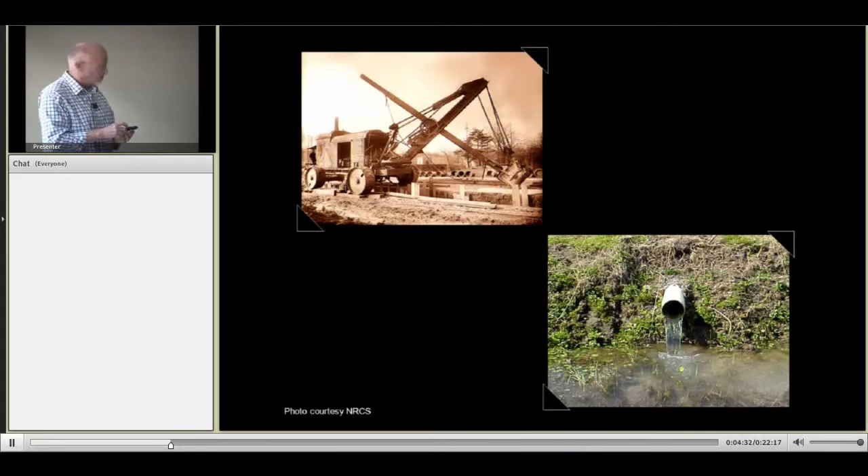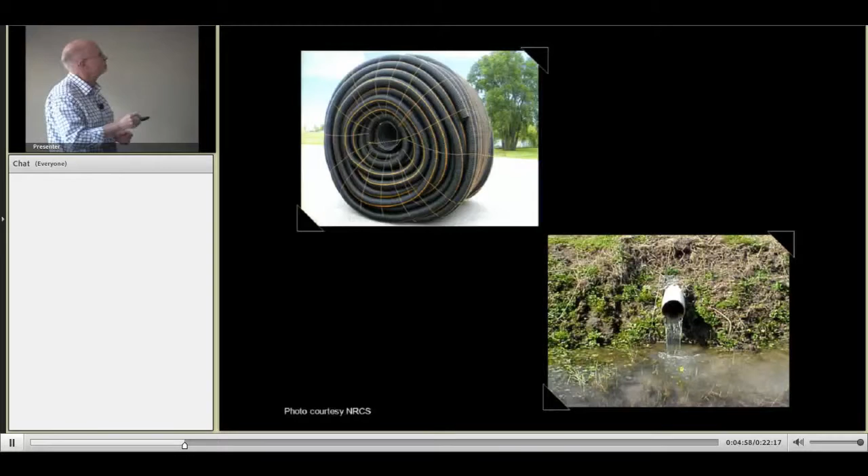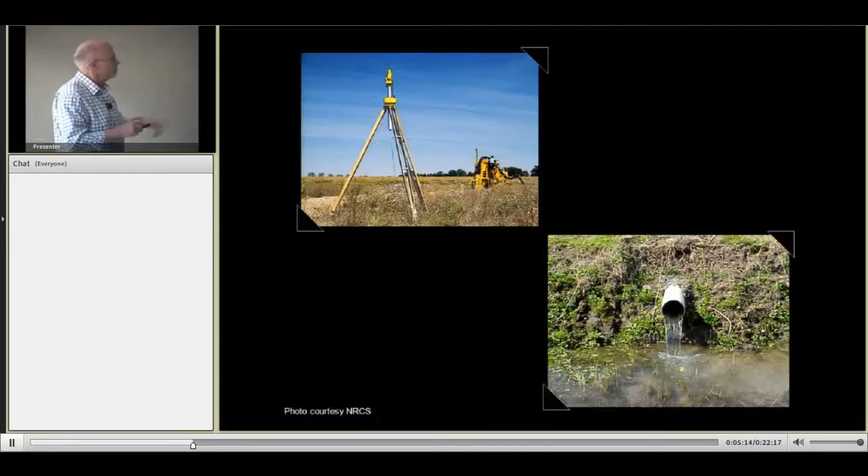We've evolved to, this is showing a laser, the technology for putting in pipe has changed. It's gotten more effective, more accurate. People can do it more accurately than they used to be able to do it. Can do it faster. This is showing a laser. A lot of the tile that's put in today is put in with GPS systems. So it's evolved. You put it in quick. You can put it in a lot of different depths. You can drain different ways.

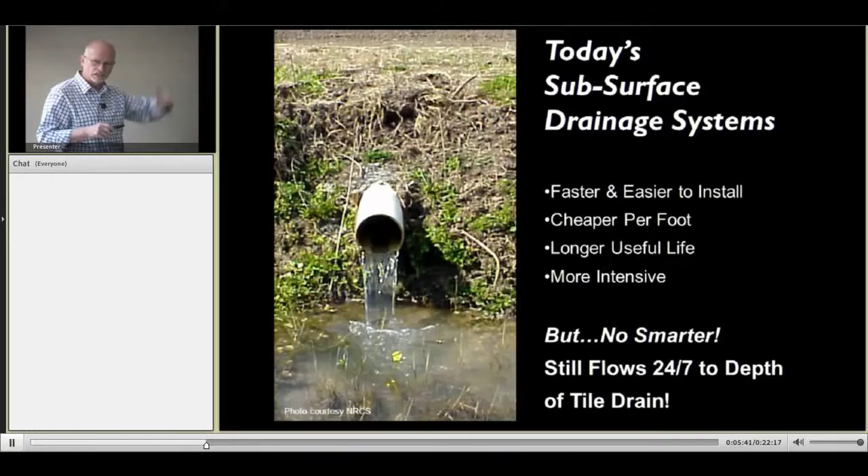So the point is that we've got to this point today where we can put in tile very effectively, but we still drain to the point of where that tile depth is, unless you get a recharge. You're going to drain down to the tile depth 24/7.

So we're talking about the dawn of a new era. This is the golden rule of drainage that Gary attempted to quote. But it really is: drain only the amount of water needed to ensure equipment access and healthy crop production, and not a drop more. That was Dr. Wayne Skaggs from North Carolina, who has been doing this for a number of years.

So you might ask yourself, well, why would we want to put this pipe in the ground? And we get this question quite frequently from producers. You spend a lot of money to put pipe in the ground to get rid of the excess water. So why in the world would you spend all that money to get rid of the excess water and then do something to keep it there?

The whole reason for tiling obviously is to get rid of the excess water, but the reason to get rid of the excess water is twofold. Looking at it as a producer would, the ultimate goal is it's going to be profitable for you. Now we know that tiling is a good investment for farmers, or they wouldn't spend the money to put it in. They wouldn't put more tile in year after year.

One of the things that farmers see is a yield monitor. They go across the field and they go across that tile and they see that yield jump. That's a pretty strong message to them that tile is a good investment. So, it's the yield potential of putting tile in.

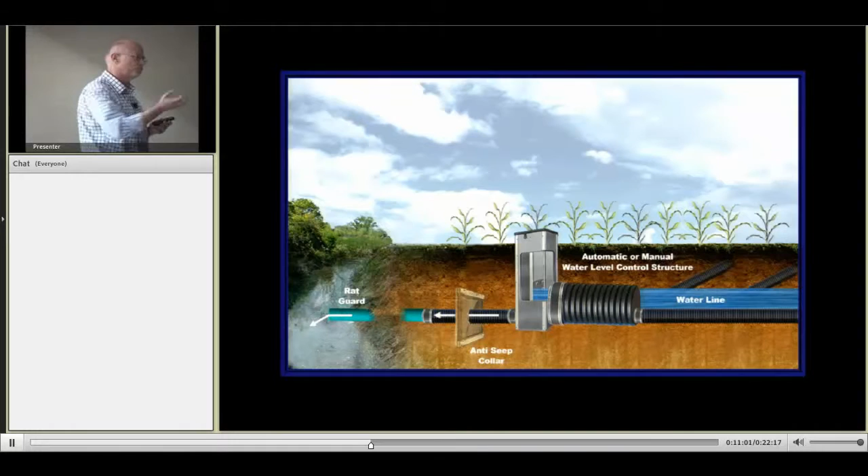This is showing an illustration of how drainage water management would work, where you've got a water level control structure. In this case, they've got like a bigger tank or a bigger pipe going into the structure. The thought there being that you maybe have that for liquid animal waste, where you could possibly pump out of that and reapply. I don't know how often that's being done, but I know in Ohio there's been a lot of research on the effect of holding the water in the soil profile for liquid animal waste retention.

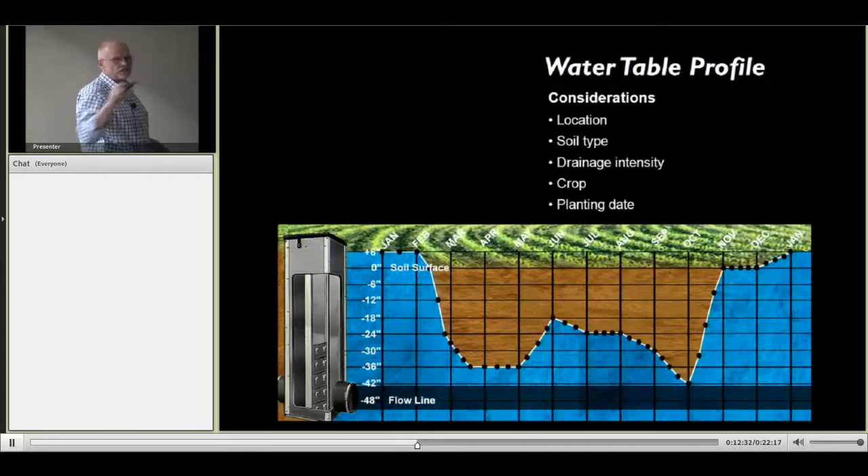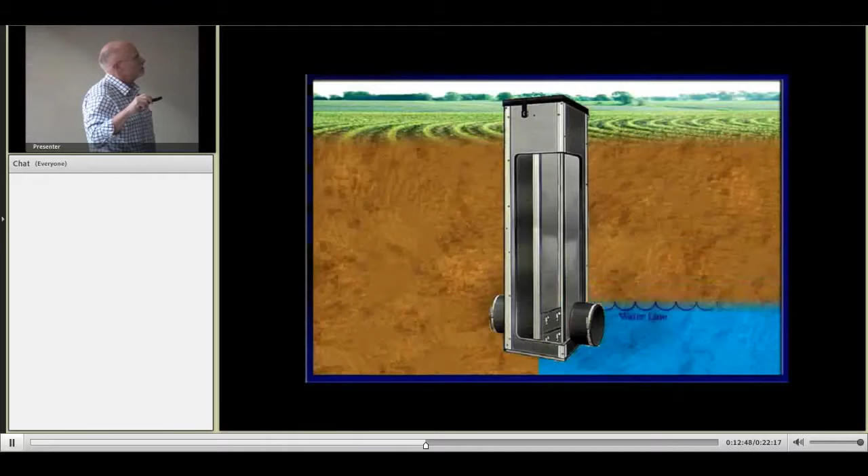This is just showing how you can use these water level control structures by stacking the stop logs up to raise your water table different times of the year that it needs to be done. This is an illustration that drainage water management obviously isn't the silver bullet, if you will, for some of the problems that we have with the water quality issues, hypoxia zone. It's applicable in flatter terrains. I wouldn't say only, but the flatter the better. That's where this practice is really going to be implemented on a lot of acres.

I think it's estimated that somewhere between 10 and 50 million acres in the United States could implement drainage water management because it's flat enough to be used. So this would show you're flat as a pancake. That's no problem. Like Gary was talking about up in the Red River Valley, it's a perfect scenario. You got a flat area. You can put one water level control structure in here, or here, or here, and you've effectively done that whole field, because what you do there is found throughout that whole field.

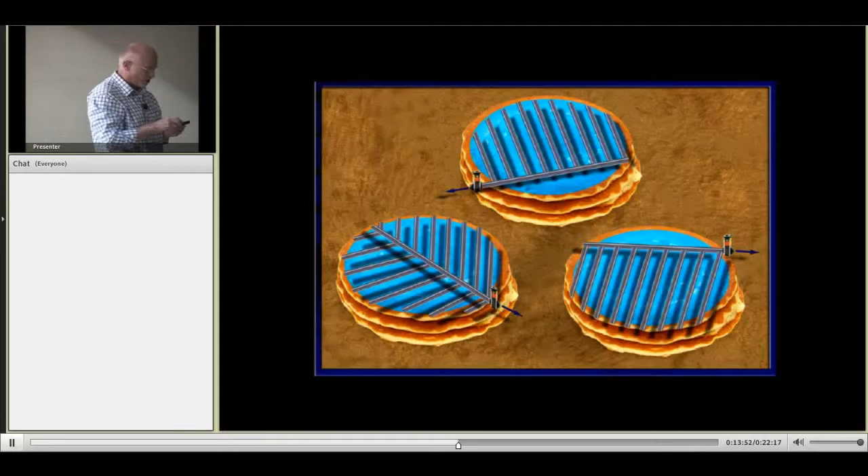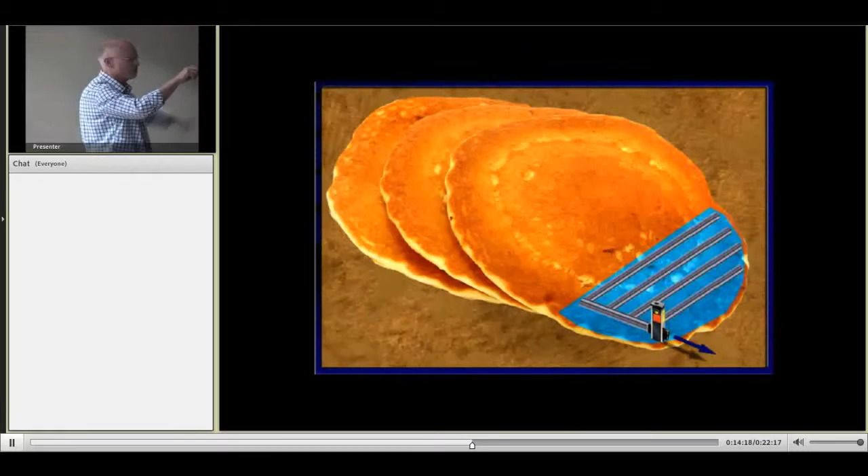But the problem is not all our topography is perfectly flat. You've got some slope, you've got some hills. So this would show if you had a system where you were trying to do drainage water management and it was tiled in this fashion, you put a structure in it, but you're only affecting a small area of the field here, because up here you're not going to have any effect because it's at a higher elevation. You can put in water level control structures to stair step that water up through the soil profile.

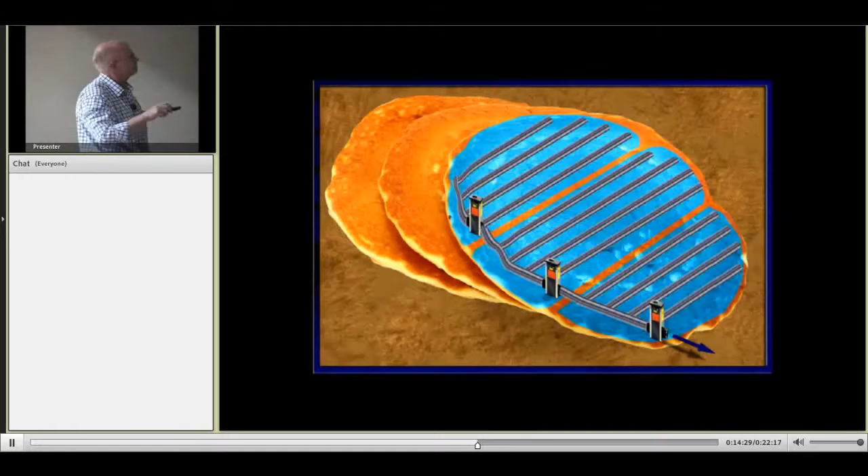That's one option. We do have a new product that's been on the market for about a year or two. It's called the Watergate, and the main advantage of the Watergate over the slide we just saw is that it's a head differential device. Basically, as the water backs up on this downstream side, it closes this Watergate, and you stair step your water table up. So as you go up through the elevation in your field, you can have these water gates installed at 1 foot elevation differences, and they can keep that water table where you want it at the other end of the field. It's kind of shown up here.

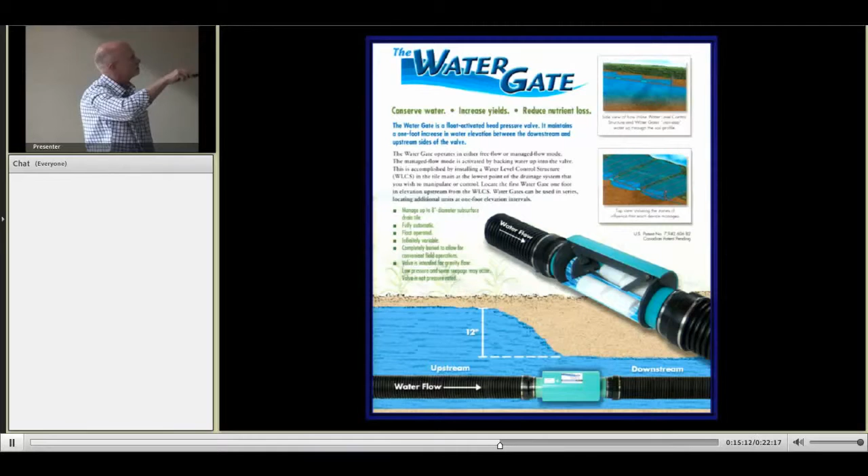So this shows a little bit clearer. You've got one structure here where you put the stop logs in to control it. You install this water gate here and here as you go up through the soil profile, and you can see as it closes, it steps that water table. The whole idea is to keep your water table consistent through that field. What you do here is what you do up here. So this water gate would help to maybe make more acres available for the practice of drainage water management.

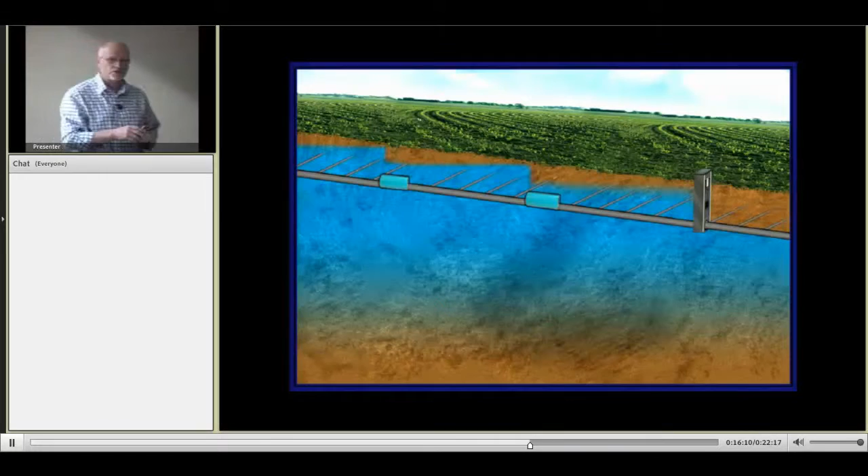The main improvement of the water gate over a water level control structure: you could do the same thing, putting a water control structure here and here, but those things stick up above the ground. Farmers do not want to farm around anything if they don't have to. So the main advantage of the water gate is that it's a buried device that reacts to what you do with the water level control structure. This just shows another illustration of how that would work.

This system has evolved. We're actually going through another iteration, if you will, of design, but we've got a system that works. What we're trying to do is get the system where it's affordable. We're in an ag market. It's a little different than a construction type market. It's harder to sell a higher priced system into that. So we're getting close, but our main focus now is trying to get this affordable for farmers.

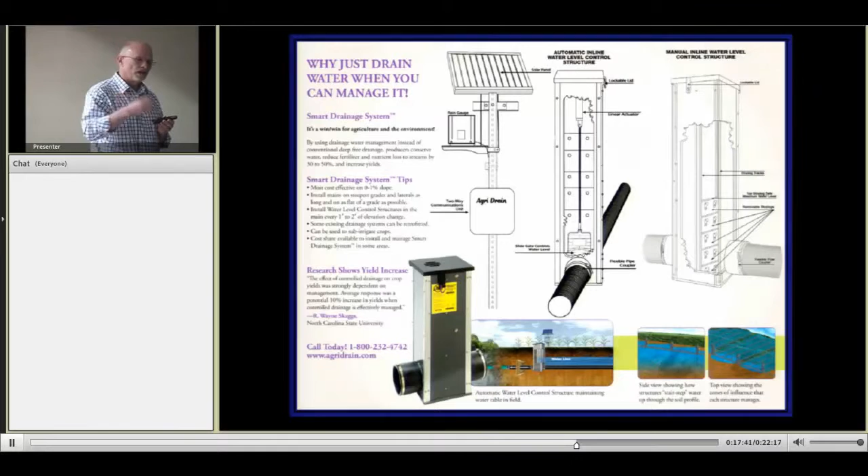And basically what you're going to do with this system is you're going to have a way to monitor the water level in the structure on the upstream side. So what your water table is will reflect what's in that structure, and this gate will open and close to maintain that water table set point that you choose as a farmer. It's a two-way telemetry system. You can monitor the water table, the battery voltage, rainfall, those types of things remotely. It's a remote system, so you don't have to be there to pull the stop logs out and put them back in when you need to change things.

This is another new product I'm going to just briefly talk about. It's our water quality inlet, we call it. I don't know how familiar you are with surface drainage, but there's potholes or terraces that are installed, and they usually have a surface riser that comes to the surface and has holes in it, and that takes that water away from that ponded area quickly. But one of the problems with that is that you also take a lot of soil, because the surface risers generally have 1-inch holes, and so when the water gets above them, it can move a lot of soil.

The whole idea behind this water quality inlet is that it has individual straws in this assembly here, and they've got like 70,000 slots in them. They go all the way through down and take the water out here. So they're a smaller opening to take that water away. Our goal was to create something that would take the water away quickly, maybe not quite as quickly as a standard riser, but quickly enough. We wanted to move less sediment, and we wanted it to be able to be farmed through within reason.

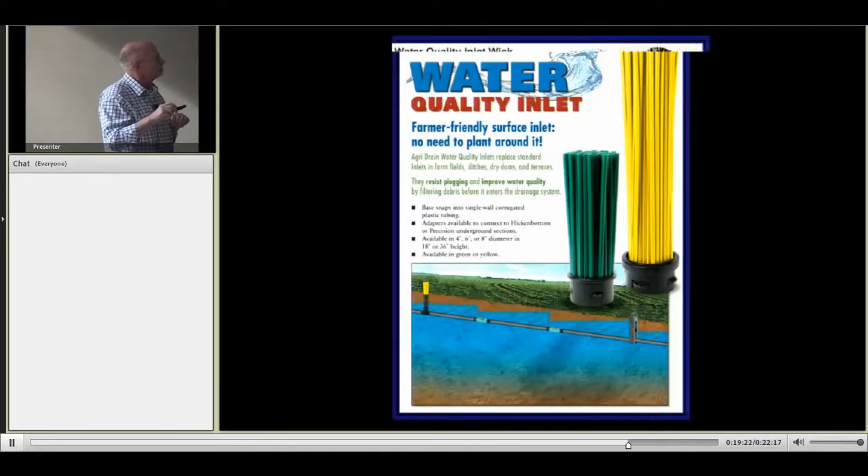So it's fairly new too. We've seen some really good results with this. The main advantage of this, as far as water quality, would be that it moves less sediment than you would with the standard riser. So this just kind of shows a potential install where you'd have maybe a manifold with these water quality inlets up. This would be your emergency. If it got too high, you'd have a riser to take the water away.

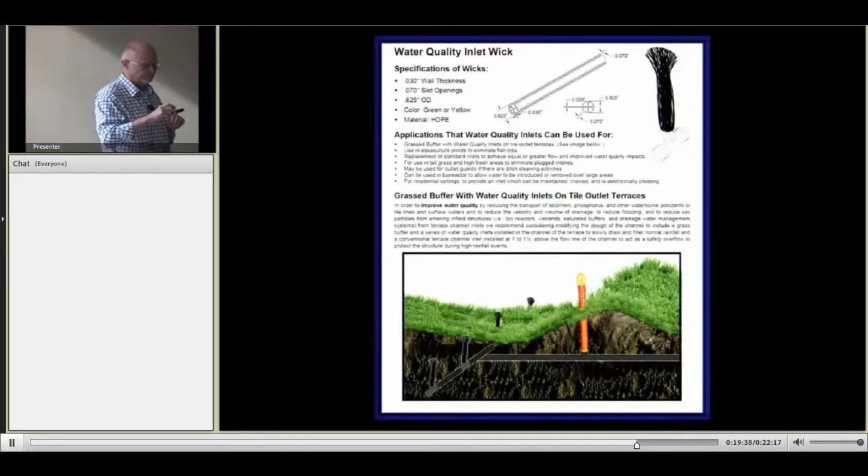Yes. Are you working on a water gate that has a different head differential to it, 1.5 or 2 foot? Yeah, that's a good question. There is, actually. Right now, the water gate that we have, we've got one, and it's got an 8-inch connection on 8-inch SDR35, so it can hook up to 8-inch pipe or 6-inch pipe. We're working on a bigger one that'll fit 12-inch pipe. That'll be out soon. But in regards to your question, we do get questions all the time. Could your device be changed for 6-inch increments or 1.5, 2 foot? And we're looking into that.